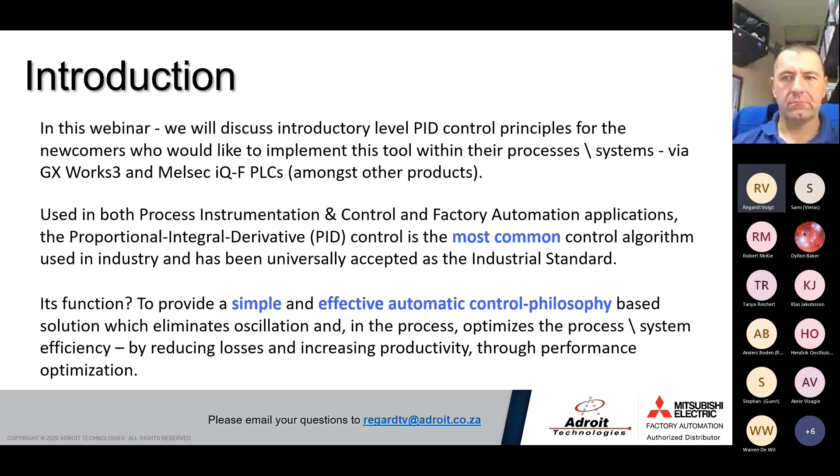So the function of a PID is to provide a simple and effective automatic control philosophy. It provides an effective control-based solution which eliminates oscillation. By eliminating oscillation, you optimize your process and system efficiency, and also increase the productivity of your system and the lifetime expectancy of your equipment.

If you think about your actuators like your valves or motors, you don't want the valve or motor to oscillate around a set point trying to maintain it based on the process variable. Because with the ramp up, the motor will get hot, and also the valve will suffer wear and tear. So a PID effectively eliminates all the unnecessary oscillations. That is what a PID is for, especially one which is correctly fine-tuned for the process.

So control systems are everywhere — you'll find them in every plant. You get different kinds of control systems, and we'll have a look at that in a moment.

Basically, for a control system you have an actuator, which is controlled by your MV, your manipulated value, and you'll also have a sensor for your process. The sensor can be a transmitter or transducer for, say, flow rate of fluid, system pressure, temperature, or speed in some cases like VFDs. It can also be level — that's very popular too. So anything you measure with an analog signal can be a process variable. Anything you need to display as an engineering value on the HMI would be a process variable.

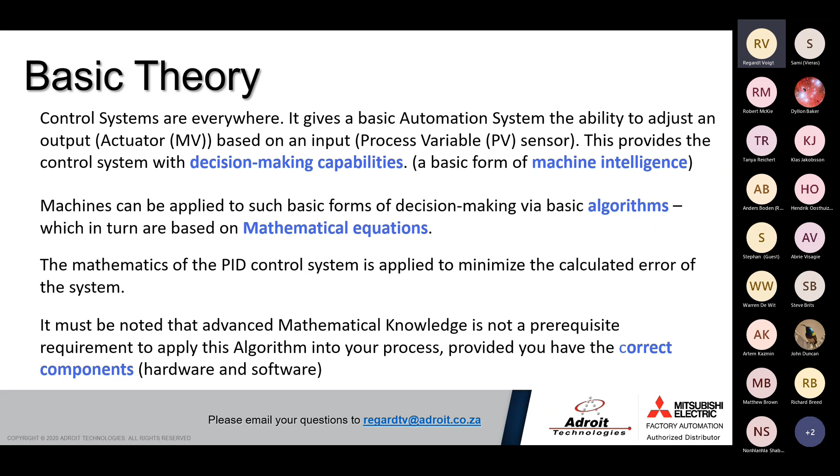PID is the successor of continuous control philosophies. It's very simple, so that's one of the advantages of PID—it's a simple algorithm relative to other control philosophies. Another reason it's so popular is because it's very robust and reliable. It's consistent, robust, and reliable, so that's why it's used a lot in plants.

By robustness, I mean that it adapts. So if you control tank level, for instance, the control process will take into account not only the consumption of the fluid in the tank, but other factors as well—for instance, if the tank expands due to temperature and the volume changes, or if there are leaks in the pipes and tanks.

All of those factors are already taken into account in your PID control system when you fine-tune it. The PID always tries to get a zero error, irrespective of how many leaks you have in your tank and pipes, or how the tank sizes change.

So in simpler terms, if you have to explain what PID means, it's a self-adapting process variable regulator. Process variable would be, like I said, temperature, pressure, level, and so on. Self-adapting means it auto-corrects the error, and it does that regulation constantly and continuously.

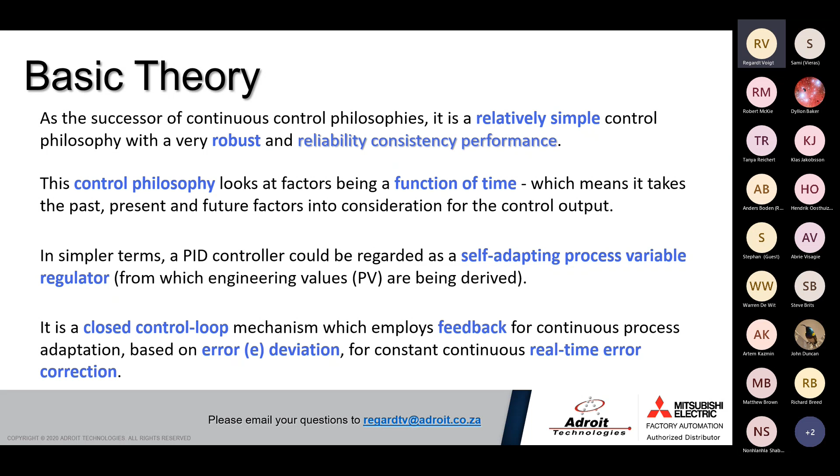Feedback and process variable are essentially the same thing. From there, it calculates the error deviation based on your set point, and it does that in a constant, continuous fashion—it's real time, as fast as the scan cycle or PID cycle allows it.

Control systems are divided into two main groups: digital discrete control systems and analog continuous control systems. The former is a more primitive control system, and in some cases it is the preferred control system—it depends on your hardware. It's based on digital discrete feedback, outputs, and inputs, so it's on-off signals.

In some cases, you won't see feedback for a digital control system, so then you will rely on sequential control—in other words, timers and counters and so on. It will be a predefined control system, used in basic control systems where efficiency is not that big an issue, as long as tank levels or temperature are maintained as required. It will also be dependent on your hardware.

The acronym for PID is proportional, integral, derivative. Those are three terms used for the PID control system. That's why in some literature, in some plants, they call it a three-term controller, not a PID controller, because there are three terms.

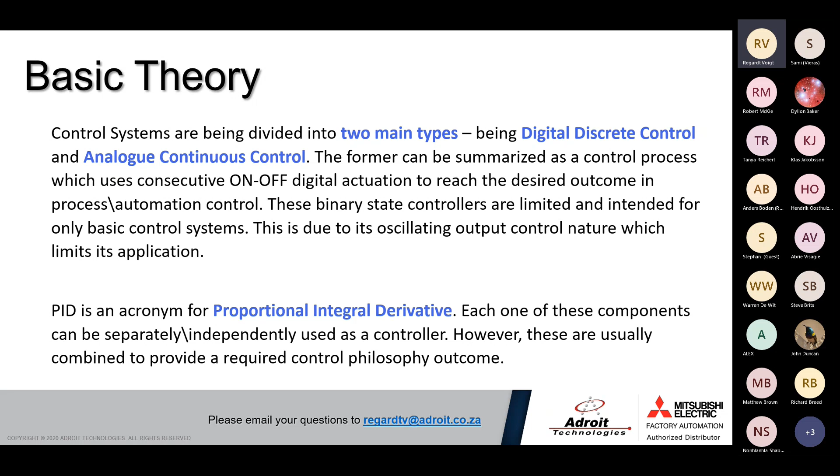So the latter control system, which is the continuous control system, it will control the process via an algorithm. And the most common of these, as mentioned, will be a PID control system.

It's worth mentioning that continuous control systems can be open loop, without feedback, but that will not be a PID control system. PID needs a control feedback.

So a rough estimation would be based on audits done worldwide by third-party researchers: 95% of all closed-loop systems in the industry are PID control. So it's quite important to understand this control system for implementation and optimization for your system.

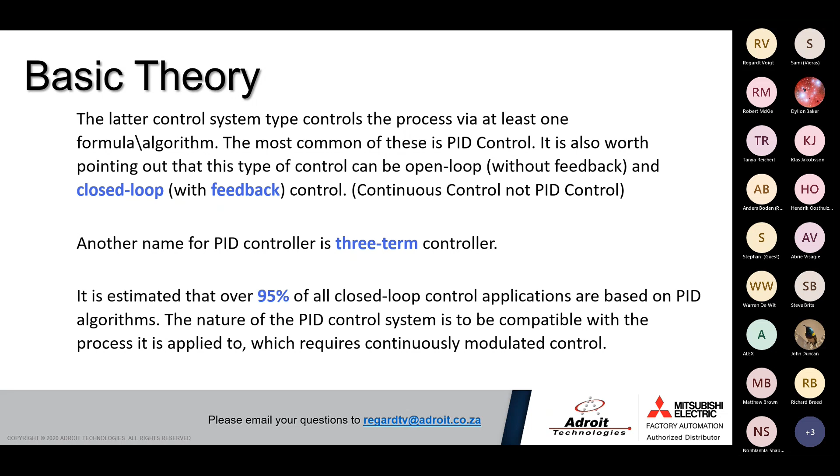As mentioned, the distinction between these control philosophies will be hardware dependent, mostly, in most cases. For instance, a PID output is mostly analog, so in most cases it will require a control valve. There are exceptional cases where a shut-off valve is used in conjunction with a PID, where it's converted into discrete control, but under standard conditions it will require continuous analog signals.

This will be for both inputs and outputs, that's the most popular layout. However, there are cases where discrete inputs and outputs are used for PID, but that's extremely rare, not the standard. For that, you'll use discrete control systems.

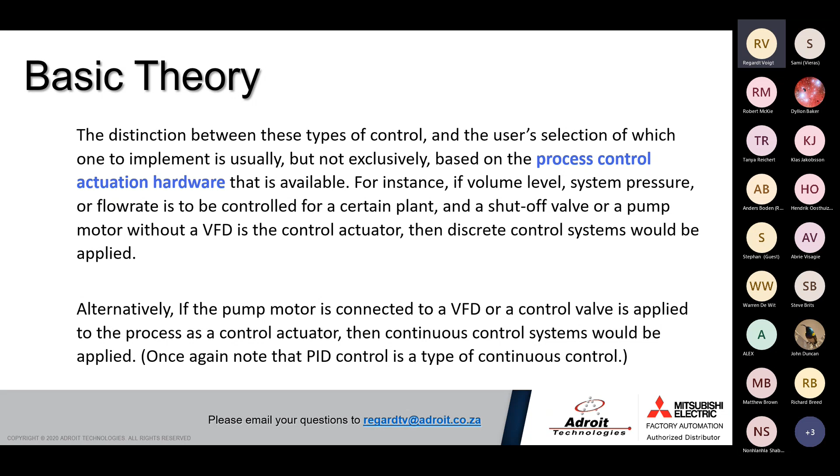So a VFD works on continuous analog signals. A VFD can be connected to a process variable of the plant, and its feedback will be controlled by the PLC's algorithm, and then the VFD in turn will be controlled by your MV to control the speed of the motor, which would in turn control the speed of the pump or fan or blower or whatever process you have, to try and reduce the error to zero.

So just to summarize, all PID control systems are continuous control systems, but not all continuous control systems are PID control systems, as opposed to discrete control systems. So two main categories will be your continuous control and discrete control, and then on both sides you get different types of continuous control or discrete control. But the one that we'll look at today will be the PID control.

The reason for this classification is you need to understand what type of control system you're going to implement on your PLC, depending on the hardware that's available in the plant, or the hardware that's standardized in your process or system, or the hardware that's allowable for your system. So if the plant for a certain process requires shut-off valves, or the budget demands that, then you will have to adapt your control system for that shut-off, which will, in most cases, be a discrete control system.

So therefore, PID is not a universal solution for all control systems. That's the purpose of this classification. But it is a universal solution for most continuous control systems.

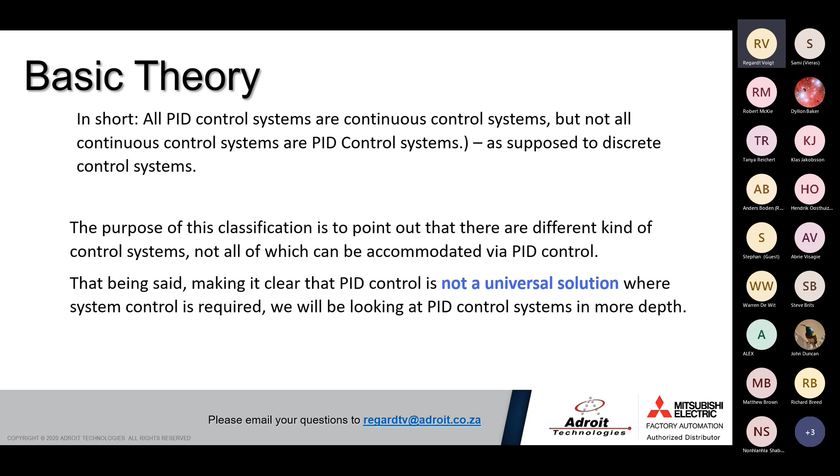A couple of advantages of PID control systems: first of all, it can be used in almost any plant process where there's a continuous adaptation to be implemented to achieve a certain value, you can use a PID. So you can use it from furnace temperatures right through to tank level controls, or to system pressure for fluids. Anything with a PV that needs to be regulated can be used by a PID control system.

It's also relatively simple to understand and easy to apply. With older PLCs, you would need to understand the fine-tuning methods to get the optimized PID. However, with new equipment coming out, like our iQ-F series of PLCs with GX Works3, it does have an auto-tuning function, which you can use to optimize your PID, which we'll be looking at in part 2 of this webinar series.

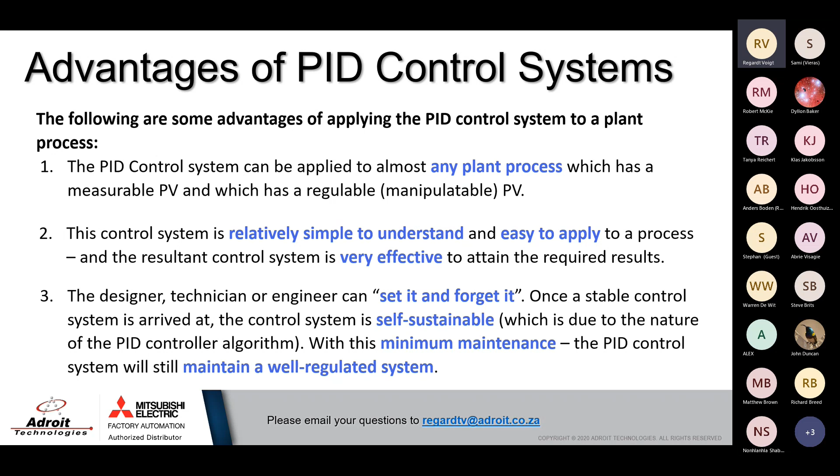It also provides a scenario where your technician, engineer, or designer can have a set-and-forget implementation, so you don't have to go every day and fine-tune your PID. It's self-adaptable, self-sustainable, and therefore requires minimum maintenance, and it will retain a relatively well-regulated system if you compare it apples for apples with other control systems in terms of maintenance.

PID system is a universal control system, as it can be used for both small and fast-acting processes like motion control, as well as larger and slower processes like tanks and temperature. Now, I have to point out it's a universal control for the sizes and equipment in the plant, but it's not a universal control system for discrete control systems. So just have to point that out.

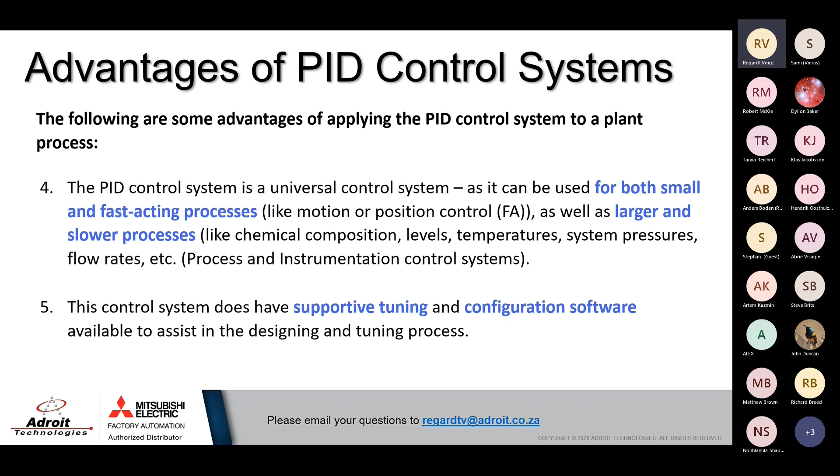Another advantage of the PID control system is that, as mentioned, many software implementations allow you to auto-configure and tune the PID depending on your requirements, to optimize it.

The purpose of PID is to manipulate the process variables that a controller receives so the controller can maintain zero error in the process. The error is the difference between what you want, the set point, and what is actually happening in the plant, which is the process variable.

There are two required measurable outcomes of a control system with a PID. You need a stable control system, so you don't want something that oscillates, and this stability is determined by the MV, your controller's output. It also needs a relatively fast response to the errors it has. However, these two requirements contradict each other.

You have to fine-tune a PID to take both of these into account and get a balance.

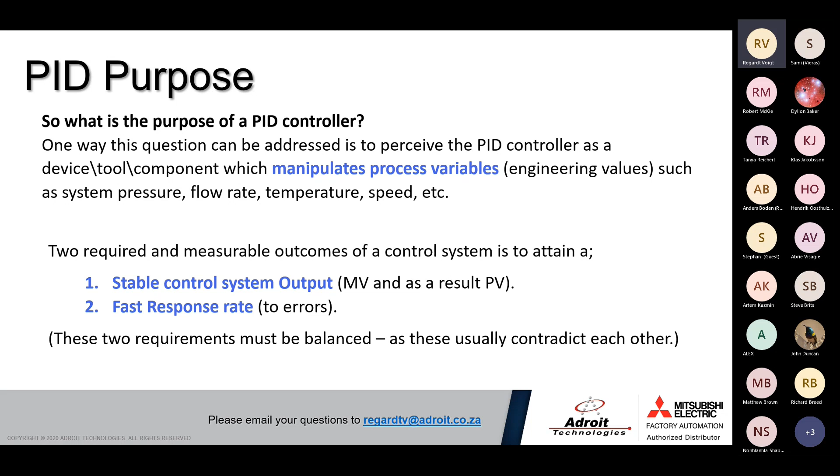So just a generic process flow of the PID. The first step is the initiation of your PID controller, where you sample your set point, which you get from your user, which can be from an HMI or from SCADA. It can be hard-coded into a PLC as a constant. There are various ways to adapt that. You can even have it as an analog input that's user definable.

Then it would calculate the error, which is the difference between what's actually happening in the field, your process variable, and your set point. Based on that error, it calculates the P factor, your proportional factor. The elements that play a role in your proportional factor is your gain, your P gain, which we'll have a look at later.

Then it would look at your totalizer value, your I value, your I factor, your I gain, and calculate the totalizer factor. We'll also look at your D factor, once again calculated based on your gain. Traditionally, for most systems that don't need fast response, the D gain is either negligibly small relative to the P and I, or it's not used at all, so you just use a PI controller.

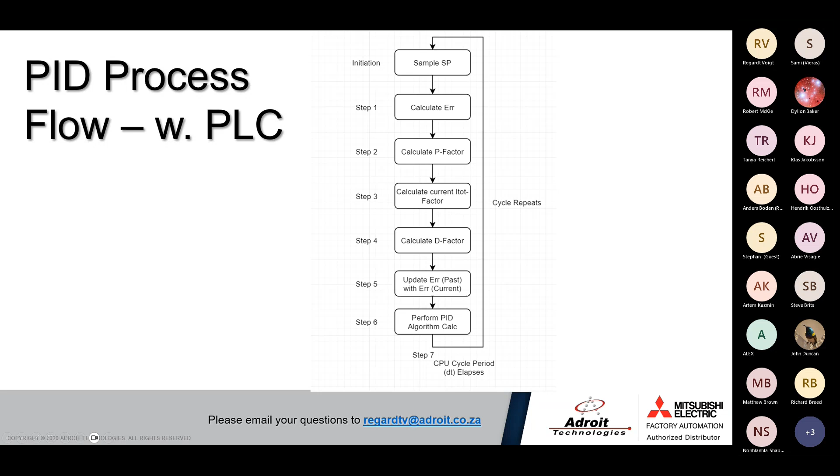However, there are a large quantity of systems that use D as well, because it has a prediction factor due to the rate of change, so sometimes it is included. Then we update the error with the current error, so now your current error becomes the past error, and the past error is removed from the system. The PID performs its calculations, and the MV, the manipulated value, is sent to your actuator. From there the process continues.

Just some definitions, since we mentioned the term closed loop. Closed loop, in short, is any system with feedback, and that feedback is used as a reference of what's currently happening in your process - am I achieving success, or do I still need to make changes to my gains, my P factors, I factors, and so on, to reduce the error.

The key point of PID control is to minimize the effects and disturbances on the process variable, because you don't want a plant that oscillates - meaning your process variable swings around your set point, above, below, above, below. You want to avoid that and get a steady state output.

Set point is what you want, the desired process variable. It's usually user defined, and mathematically depicted as R as a function of T. Your process variable is what's actually happening in your process, not your desired outcome, and it's measured by your sensors and sent to your PLC.

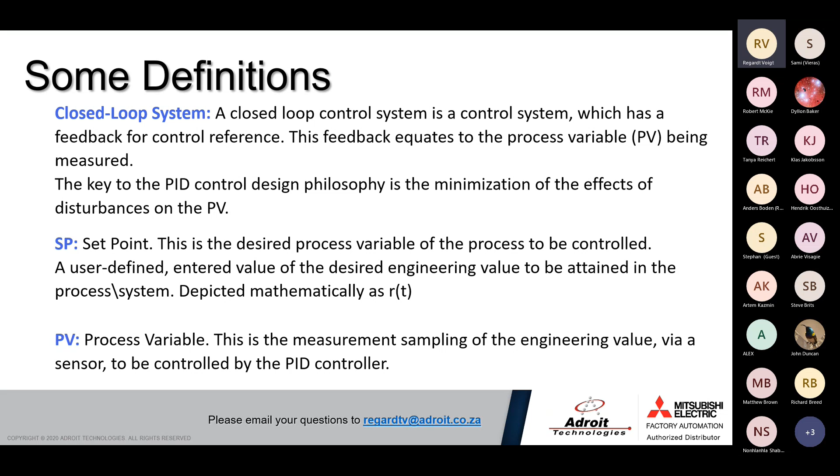The plant is the system we want to control. We're not talking about a production plant, a process plant, or a batch plant - in this case, a plant can be anything you want to control. It can be a tank, conveyors, a furnace, anything that needs to be controlled, anywhere the process variable is measured and the set point is determined. That would be your plant.

A plant can be a combination of sub-plants, where there's a combination of different process variables and set points. And then you move into the area of cascade control, which is a bit more advanced - we'll look at that in future webinars. But for now, we'll just look at a single PID control system, no cascade control.

Your actuating value, as mentioned, is your analog signal - in some cases digital or discrete - but for this webinar, it's your analog control signal that goes to your actuator to control it, which in turn controls your plant, which affects your process variable, which affects your feedback that goes back to your PLC.

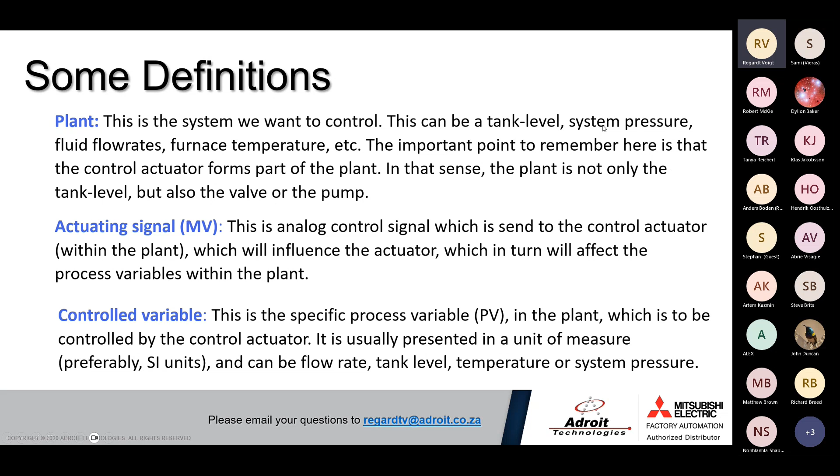Controlled variable - in some hardware, manuals and books you'll find this term. What they actually mean is it's the process variable for the plant. As I mentioned, there's a gap between theory and practical implementation - the textbooks with calculations don't refer to process variable anywhere, many of them. So control variable is your process variable. That's just something to take into account, since there's also your PLC resolution output to consider, which needs to be scaled. If you're confused, anything that has an SI unit, like kPa for pressure or cubic meters per hour, that would be a process variable in this case.

Lag time is a time constant - this is for manual fine-tuning of your PID control. There are many methods for fine-tuning, like the Ziegler-Nichols method, and in this case they use lag time as a variable for fine-tuning. The lag time is the period from when the PV, the process variable, starts to change or adapt, to the point where it reaches 63.2% of your set point value. That's used to determine the lag of your control system, the delays, and how to correct that.

Then you get your dead time. Dead time is the time it takes for your controller output to affect your process variable. When your controller sends an analog signal update to your actuator, from that moment to where your process variable actually starts to change, that's called dead time, DT. So it's a function of time.

Your error is the difference between your process variable and set point. The error can be both negative and positive, depending on if you have a direct/forward control system or a reverse control system. In a forward control system, your error will be set point minus process variable, whereas in a reverse control system, it can be process variable minus set point. Those two can be swapped around depending on the control system.

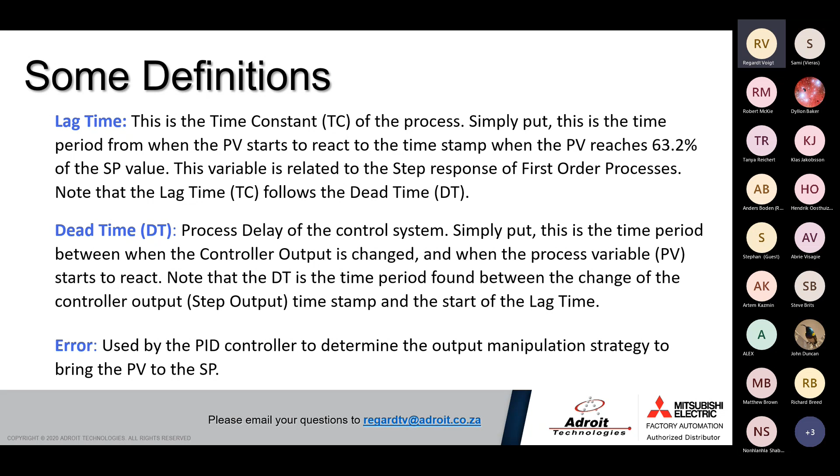Manipulated value, as mentioned, is the output of your PLC that goes to the actuator, usually an analog signal - traditionally milliamps for long distance applications, or 0 to 10 voltages for short distance applications. It will never be temperature, because temperature is a process variable - it will always be an analog voltage or current signal. This is depicted as YT, though in some control systems it's depicted as UT, so take that into account so you don't get confused.

Then your steady state error. This is an error you get if your I, the integral factor, is too small. What happens is your PID control system will control the output of the process variable via the set point until it stabilizes right below, and sometimes above, the set point, never actually reaching it, because the changes are too small to reach the set point - it takes a very long time. So it looks like a straight line, very close but never reaching it. That's your steady state error. One way to fix that is to increase your I gains.

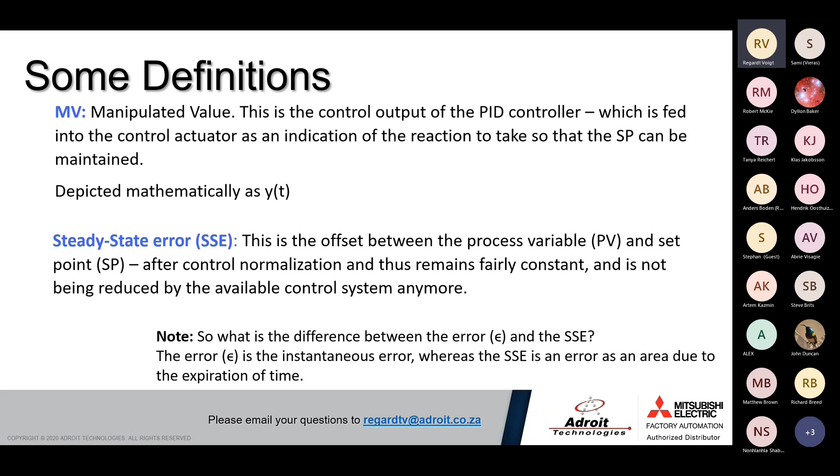Okay, so we spoke about gain a couple of times. Each one of these coefficients, the PID coefficients, has to have a gain, which is either user-defined via fine-tuning or PLC-defined via auto-tuning. These are static variables - once determined, they are used as constants in the PLC. They can be seen as amplifiers for each of those coefficients. The larger the value you multiply with, the larger effect each one of those coefficients will have.

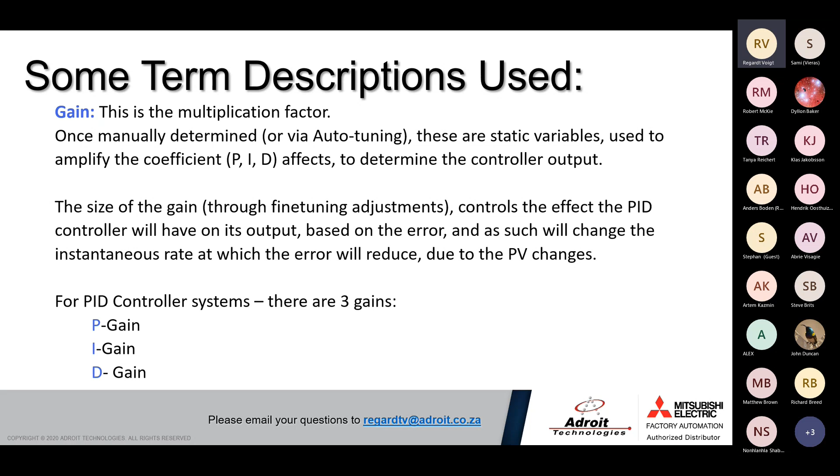So I just want to point out that your P is your proportional control, so it will look at your current instantaneous errors. With the I, that's your integral control, so that looks at historical time - that's why it's popular for control of your steady state errors. And D, which is the least popular of the three coefficients but many systems use it, looks at the rate of change, so it looks at the future. It will predict what the error will be and proactively try to manipulate the output to address that predicted error. So those are the three gains you use for PID.

Output, as mentioned, that's the output of your controller. It's depicted as YT sometimes or UT, depending on the diagram you use. Sometimes in some diagrams you use both of them, and in that case your YT will be the feedback value that comes out. So that's just something to take into account. But like I said, that's your analog signal.

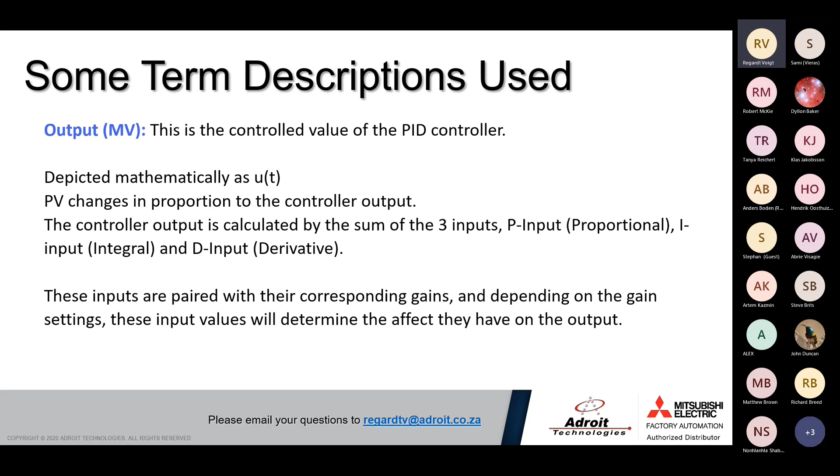That goes up with the PLC outputs. Right, then the cycle time - some manuals call it the cycle period. It's the time it takes for the controller to perform the PID algorithm calculation each time, so the rate it does that. This is configurable in our PLCs, you can change that. The faster it is, the higher the performance of the output. But it's also very resource intensive on your PLC, both from a software point of view, the CPU, as well as the hardware, the analog parts. So that must be taken into account.

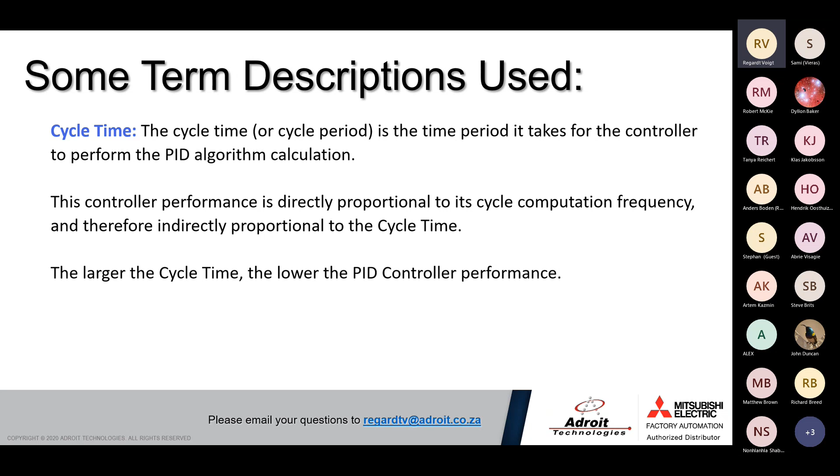So the frequency, the higher the frequency, the higher the performance. And the frequency is indirectly proportional to your cycle time, so the larger your cycle time, the lower your computation frequency, the lower the performance. For very, very large tanks with level control, a larger cycle time would be allowable. For a very small or fast reacting system, you'll have to have almost instantaneous cycle time, a very high frequency computation frequency.

PID control action - so now we get to the reverse acting, direct acting, and forward acting actions of a PID. I just want to point out these definitions and descriptions. Many of these will be used to actually configure a PID block. There's a lot of variables to configure, 29 to be precise, to optimize and fine-tune your PID block, so you will need to know what each one of those variables are. However, many of these terms you will not find in the PID block you configure, because those will be applicable to your plant, the actual actuator and the process and so on. So some will be used in our demonstration at the end, and some will not.

So control action - the easy way to understand the control action, forward or reverse, is to understand the effect the MV has on the output to the process variable. In other words, a direct acting or forward acting PID controller is one where the output of your controller increases if your process variable increases. The reverse acting controller is one where your output or MV decreases if your process variable increases.

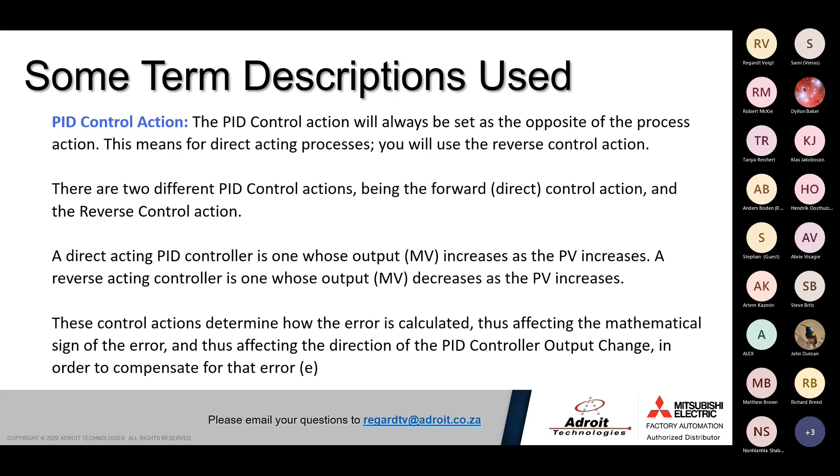Okay, then we look at the cycle period, which is different from the cycle time. The cycle period is the period during which the PID actually executes the calculation. It's not necessarily dependent on your PLC scan rate, for instance - that would be your cycle time. This is your PID performing a calculation.

You can let your PID calculate every second a new MV and send it to the controller, or you can do it every millisecond, depending on your application. However, the more powerful your CPU, or the more modern the PLC, the higher PID rate you can have - a lower cycle period. Because the higher the period, the lower your PID performance.

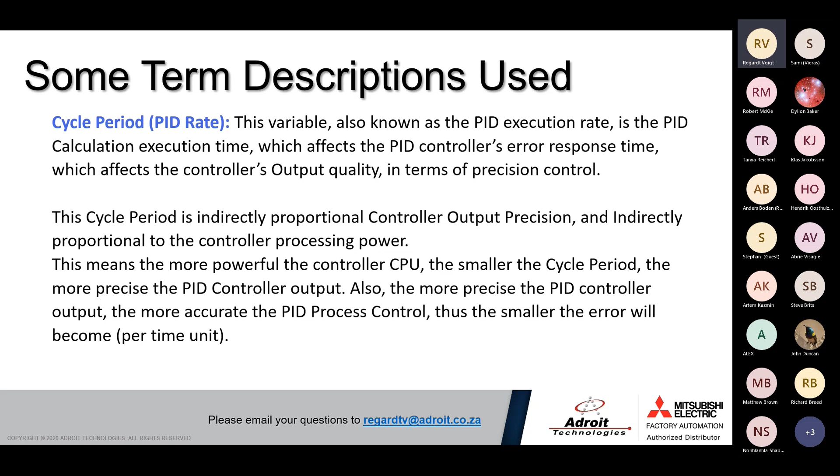Let's look at the three algorithm factors very shortly. As I mentioned earlier, this is only for introduction and basic purposes. So we omitted all the complex mathematics and replaced it with descriptions so that you know what each one does. For part 2, we'll have a deeper dive into the mathematics.

Okay, so the P factor. This factor addresses the instantaneous error, the difference between your set point and process variable, and tries to mitigate it immediately, proportionally. So the bigger the error, the bigger the MV would react - the more intense the MV output will react to mitigate that error.

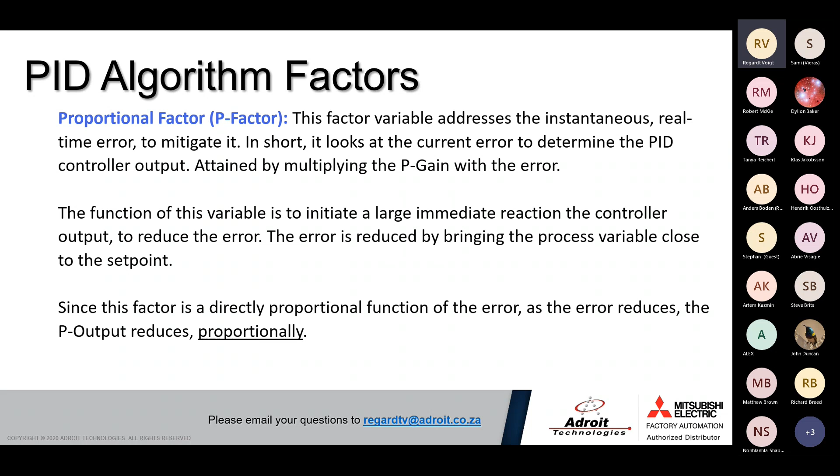So many understand the P factor as current control. It looks at the current error, so that is correct. It doesn't look at historical values, it doesn't look at future values or rate of change. It looks at the current values, so it reacts proportionally depending on the size of the error. The proportional factor will always be required, because you will always require your controller to react to the error.

Then you get your integral factor. The integral factor is a function of time - it looks at historical errors, the error that's built up over time. And if this integrates or totalizes to a large value, your I gain, your I factor, would be very large. It will react very intensely based on your I gain, which is user defined.

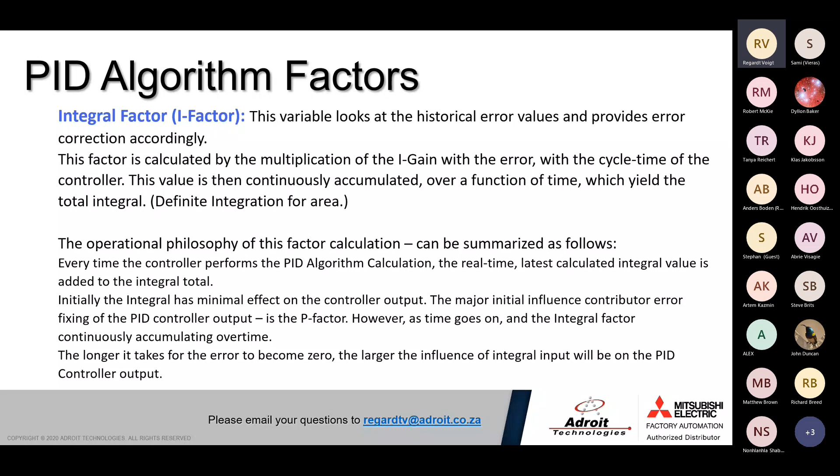And also, as I mentioned, if you see in your control system you've got a steady state error, then you simply have to increase your I factor. That's what we use for such errors.

Right, then you get your D factor. Your D factor is the change of a process variable over time - so that's a derivative factor, not an integral factor, it should be a rate of change measurement. So the faster your process variable changes, the higher your rate of change value.

I'll just add as a side note, the D factor, as mentioned, is not the most popular one used, and when it's used, it's not very large. There are a couple of reasons for that. Sometimes your system, you don't want to overshoot - you don't want the process variable to overshoot your set point. Because if it overshoots, it would see the rate of change is too high, and then it would try to aggressively mitigate that, and then you get undershoot, overshoot, undershoot.

And so that's why your D factor, if used, in most cases for smaller systems must be small. For larger systems, like large tanks and furnaces and so on, it's not very problematic, and also it's not very effective in those systems. So in many of those control systems, you will just have a PI controller.

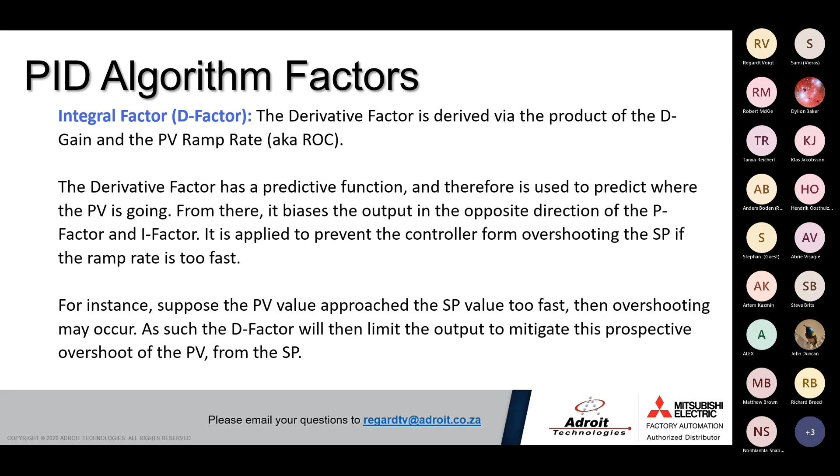Just a short summary of the structure of how a control system looks like. So you have your user, top here, in blue. The user says, okay, today I want to have this set point for my process. In this case, this process or the plant would be your tank level with your two variables, which is your control valve variable and your sensor. So your sensor will measure your tank level, and your control valve will be controlled by the PLC.

So your sensor will sense the tank level. It would send that analog signal to the PLC as a process variable. Your PID would calculate the error and then adapt the output current or the output voltage going to your control valve as an MV to address that error. And so the cycle continues automatically.

That is irrelevant of the leaks and the size of the tank, and if there's any heat expansion, or if there's a difference in viscosity of the liquid. All of that is taken into account in your PID controller, because your PID controller wants to get a zero error as effectively as possible. So it doesn't look at other factors like the liquids and other properties. That is already included in your plant, all those elements.

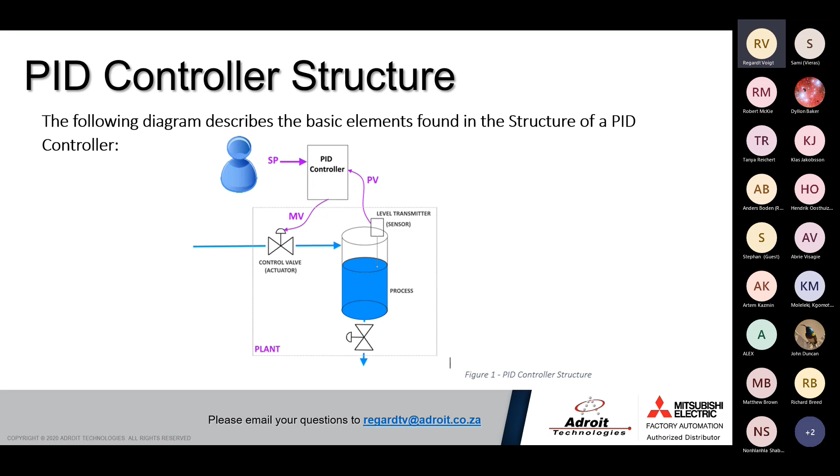I just want to add another point here regarding the D factor. It's very sensitive to rates of change, because it's a rate of change, it looks at rates of change. Noise on your cable, your analog signals and analog wires, can be defined as a rate of change. Your PLC doesn't see that as noise, your PLC sees that as a very high instantaneous rate of change.

So in such cases, you either have to totally shield your cables or move your cables away from anything that will cause noise. And if that's not possible, you're going to have to decrease your D-gain value, so it's not so sensitive to the noise. So D can be used as a damping factor for noise.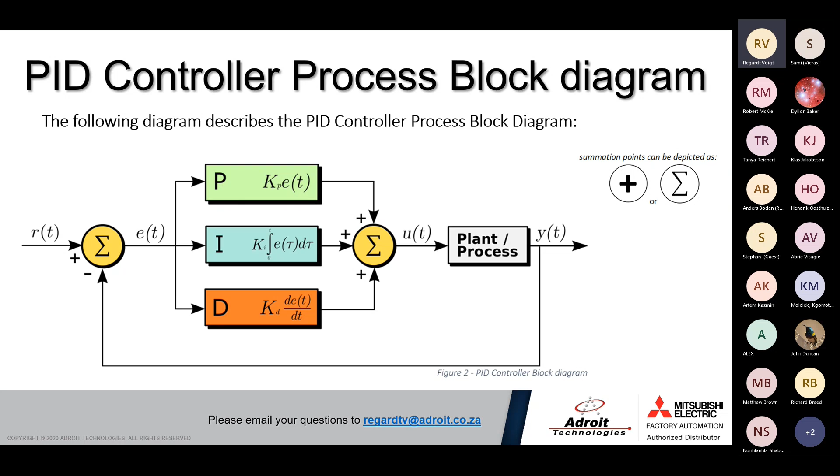So the principle of operation, your PID controller, the task of it is to force your process variable to match the set point, that's its objective. Your process variable is sampled as your feedback, FB, and those two are the same thing. Your PLC or your PID block in the PLC will have reached its objective if your error is 0. Your error will only be 0 if your set point, which is your feedback, equals your process variable. Otherwise, it will always constantly try to manipulate the output variable so that it can reach that 0.

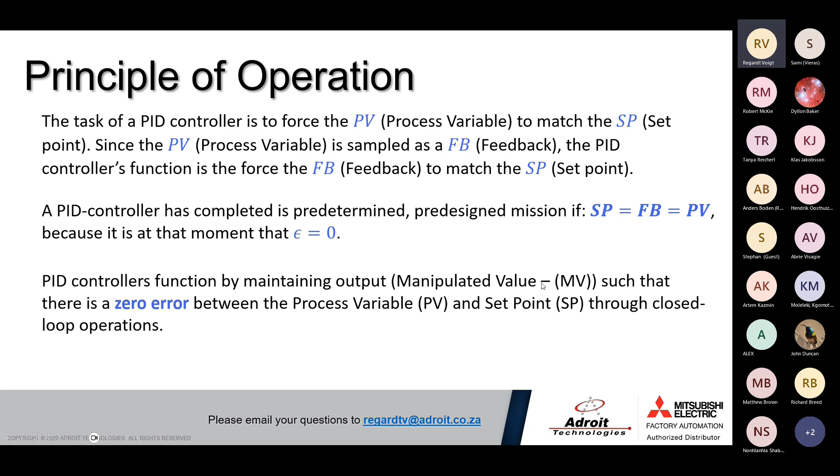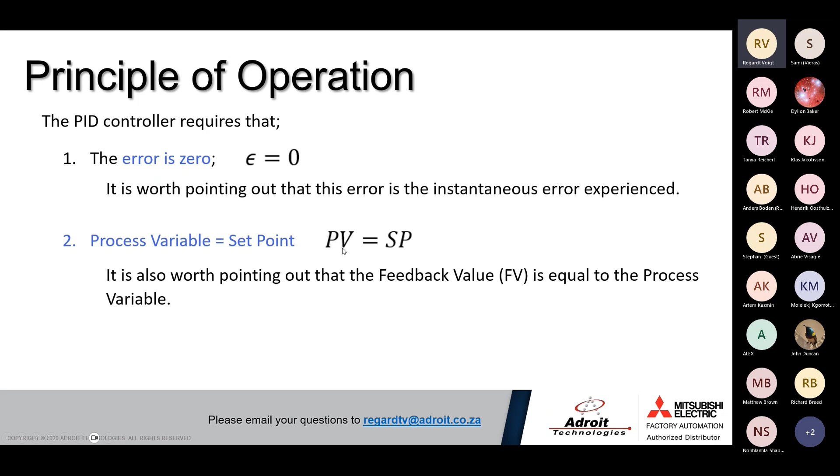So those are the two requirements as mentioned. It either requires your error to be 0, or it requires your process variable and set point to be the same. Which means, in fact, these two are exactly the same requirement, because PV minus SP gives you 0, it means they are equal. So your error will tend towards 0 as your process variable tends towards your set point.

So how does your error increase in a plant in the first place? Your error increases if you, as the operating user or the plant owner, change the set point. Immediately, an error is detected. Another factor that can increase the error is if there's a change in your process variable, so if there's a higher production, a higher drain, or a higher requirement in the plant. So if more temperature is required or more flow rate, then that error will increase as well.

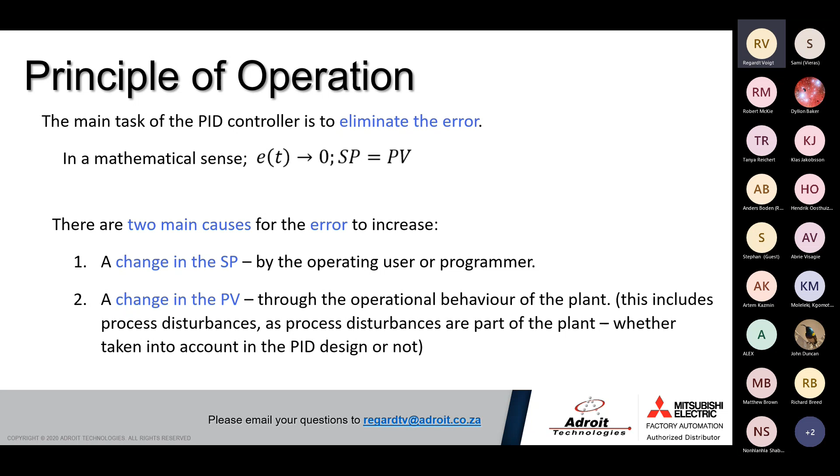As mentioned, the output of the PID controller is u(t), and in the PLC it would be parameterized as MV. The MV affects your process variable, which is your engineering value, if you look at it from a HMI/SCADA point of view, and that would be your process variable of the plant. This will be the variable that's given back to the PLC as feedback.

Of course, it's a closed loop system. From here, the error is being calculated and MV is being updated, and the system repeats itself iteratively and continuously. So all of these elements here, the process variable, the MV, and so on, they all are factors of time, because the PID control system looks at time: future, present, and past.

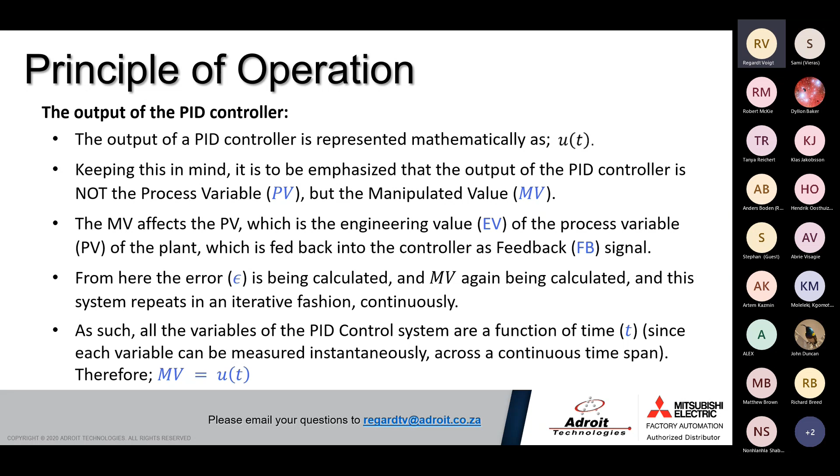So if we look at the function block in GX Works3, first of all there are various types, various numbers of function blocks that are used in GX Works3, depending on the PLC you have. Your modular PLCs will have slightly different PIDs than your compact PLCs. However, there are function blocks common to both. There are also older PID blocks, which you would find on your A series and your Q series, which is not used in your iQ-R series. So that also needs to be taken into account. You get different kinds of PID blocks that are used.

The most common one will be the one we have here, and that's the one we'll be using for this presentation, because this presentation is based on GX Works3 and FX5, the compact PLC.

So you'll see that this block, everything on the left-hand side can be regarded as inputs, and the right-hand side is regarded as outputs, and then it has 3 variables on the input side, if you exclude the EN. So the S1, that would be your set point, or your target, your set value. So we know it's set point. S2 will be your process variable, that would be the one that's measured in the field. And then S3 would be your parameters. So all these elements which we discussed, or most of them, would be parameterized at S3. Take that into account. And then D would be your MV going to your plant.

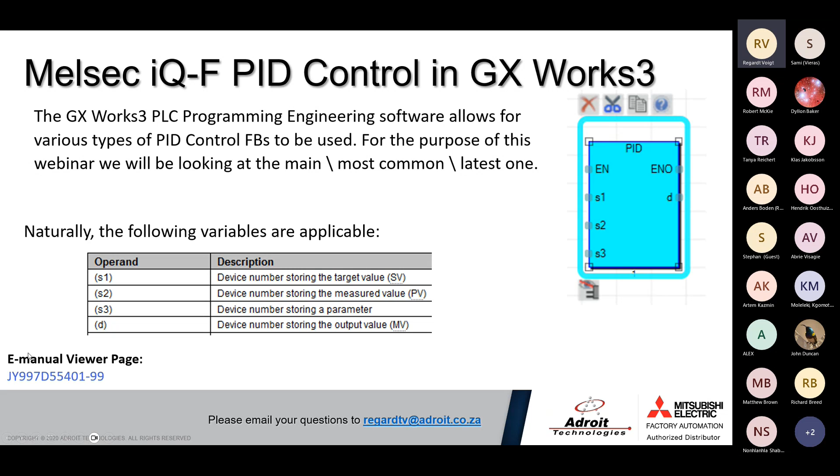Note that many of my slides do have reference numbers at the bottom, which you can copy or use for your own research, because, like I said, we're only covering the surface here. This is a long-term training topic, covered in our advanced PLC training course as well, to some extent. But if you want to do your own research, or you have an applicable system in a plant and want to see what the variable is, we have our pages here at the bottom so you can have a look at the references.

So from a block diagram point of view, you will have your input command, that's to enable your PID block, which is equal to this EN here at the top. And then obviously you have your PV, SV, and your MV, and also your parameters, which is very important. So if you would do your fine tuning of your PLC, then the fine tuning would be the updating of your S3 values, your gains and your times.

We have a deeper and more specific look on that function block, so the parameterization coefficients that we use for the parameterizing of this block. If you look at this S3 here, I can just go back -- this S3 here, which is the same as this S3 here. That S3 consists of

various consecutive -- I have to point out the word consecutive, sequential words to configure this PLC. So it's not one word, it starts at S3. So this first parameter that you will put here, your device, would be the first parameter or a series of parameters that needs to be configured for your PID.

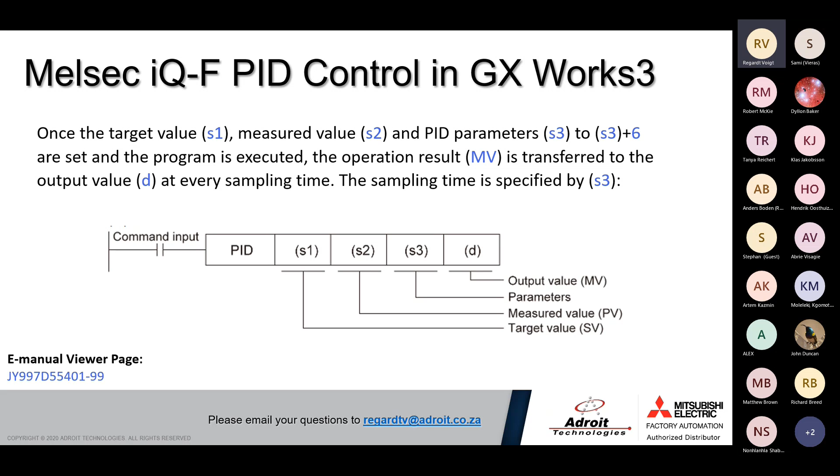These ones are the ones that's most typically used. There are many more -- I think it goes up to 25 or 29, depending if you're doing auto tuning or just standard direct action or reverse action control. But these ones are the absolute minimum that you have to look at to have a basic control system. As mentioned, we're looking at basic control systems here. If you want a more in-depth control system and want to look at more variables, then the page number here, bottom left, you can have a look at that.

Like I said, there's eManual Viewer. It's freely downloadable from some of our knowledge base sites, also from the main Mitsubishi site. You will find the latest version there. And if you can't find it, you can just drop me a mail. I can give you a link to that. So it's very valuable, and there's a lot of detail in there.

Okay, so let's have a closer look at these parameters here. So S3 would be your first word, your D word, your first address. So that's your sampling time. As I mentioned, your sampling time is directly proportional to your PID cycle time. That would affect your update time of your PID's process variable. The sampling time is how fast it would take the samples. In this case, the sample would be your PV, your plant, your process variable.

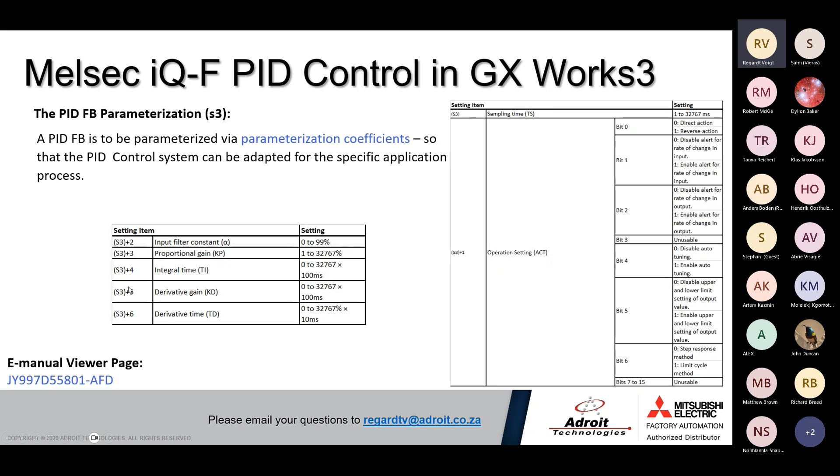Then you've got your gains. You've got your proportional gain KP. You've got your integral time, which is a factor which you multiply by 100 milliseconds, your derivative time, and your derivative gain. Okay, so this will be used on these words here.

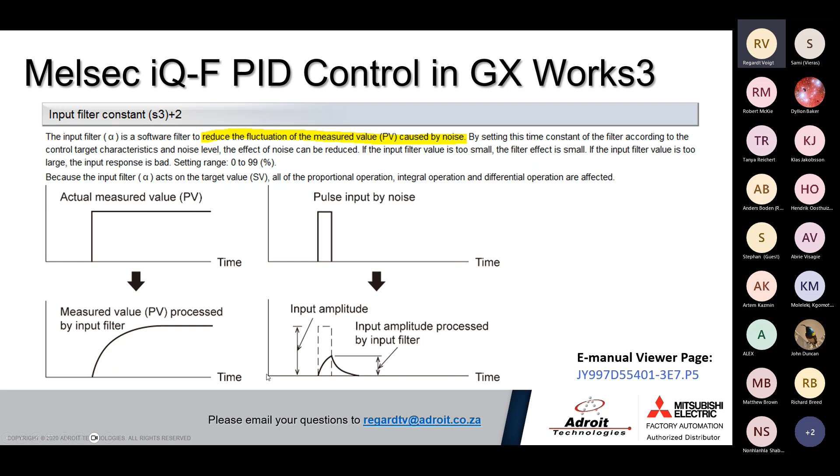Just more detail on your filter constant. So that would be for your noise, that's measured in your PV. And if your plant demands that you have a D factor, then you will have to implement a high filter constant. More information on this page.

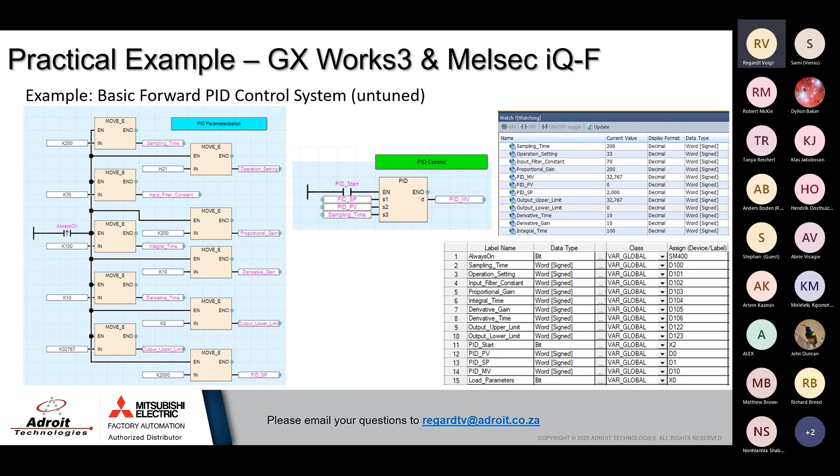So just as a demonstration on how this would work, I have this here.

Right, so here we've got a little block which we configured already. The sampling time I made 200 milliseconds, can make it much faster. Then your operation settings.

Okay, so if you recall from the presentation, it would be these bits here. Now these bits here are consecutive bits, and if you have a consecutive binary word of bits, it's expressed as a hex value.

Okay, let me see if I can start my calculator here. I'm just going to put it to programmer calculator so we can have some conversion here. So I want to turn on bit 0, for instance, for backwards control.

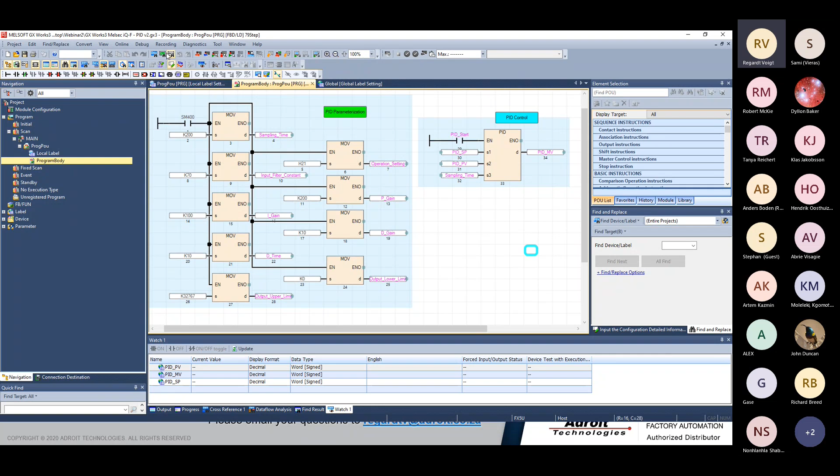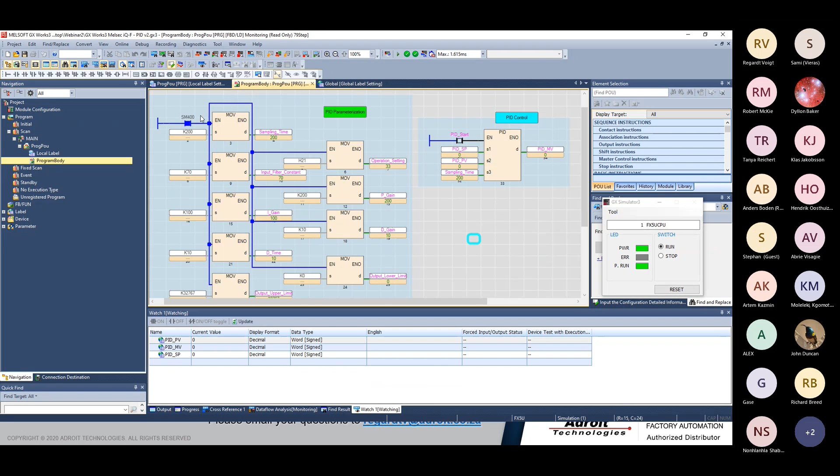So if we do a simulation here, okay, the program is running here, and I use SM400 here, which is your always-on bit for your PLC. So the moment your PLC starts up, it will move all of these coefficients into your parameters, which is all linked to S3. So now if we enable our PID block, okay, the output stays 0.

Why is the output staying 0? The output stays 0 because your error is 0. Your error is 0 because your set point and your process variable is the same. If we go now and we change my set point, I want it to be 1,000, or let's say 50% for the tank level. 50.

Okay, now we see that the PID is now sending an analog signal to your valve or pump, and it is trying to mitigate that error.

And as you go closer to that error, let's say we are 36% now, you will see that this value is updating slightly lower. And if you go very close, it would be very slow changing because now it's reaching that steady state error to reach that set point. And then if we reach 50,

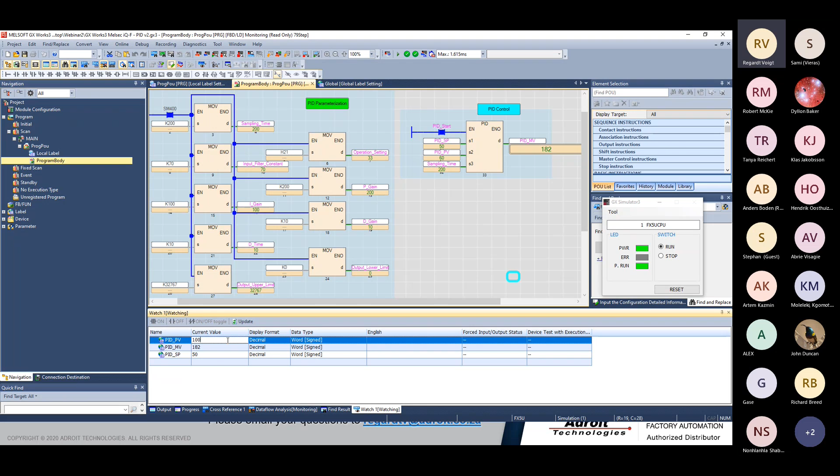your PID stabilizes. However, if we overshoot, if the tank goes too high, for instance, or temperature goes too high, now you see your output lowers. So now your PLC tries to reduce that error. And obviously, the bigger the error, the faster it will try to reduce that error. Okay, so that is how that will work.